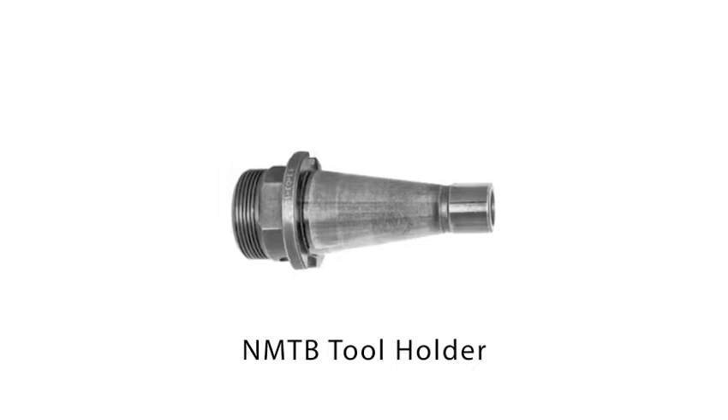This NMTB tool holder is the type of tool holder that was used in manual milling machines from 1927 until today. The wear pattern shown was typical on 7/24 taper tool holders.

This is the desired wear pattern that CNC V-flange tool holders should still have today. The only difference between the V-flange holders of today and the NMTB tool holders is that the straight diameter of the small end of the NMTB holder was removed, and a retention knob replaced the drawbar.

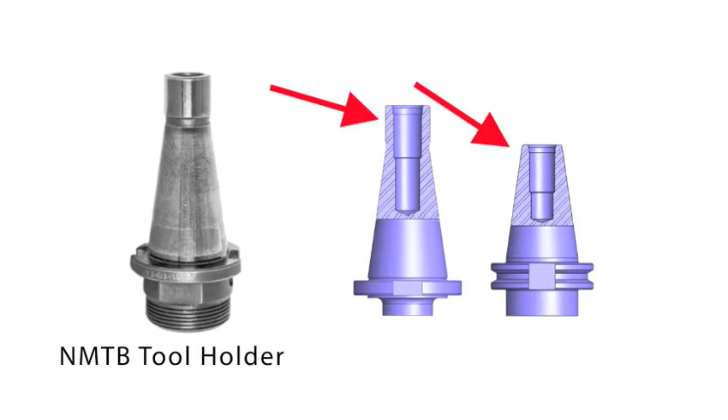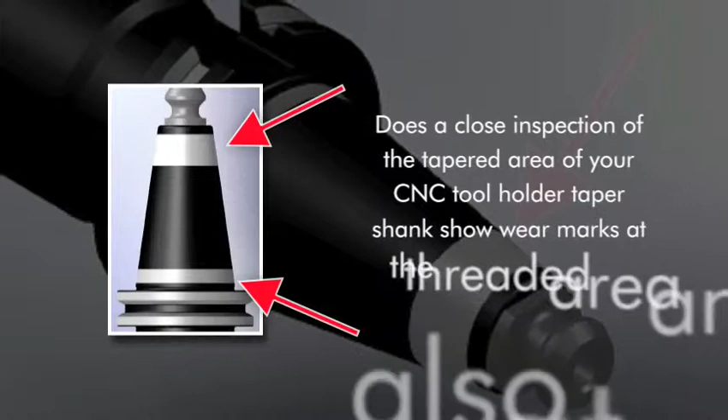Note that with the NMTB holder, the drawbar threads ended in the straight diameter and never entered the taper area of the tool holder. Does a close inspection of the tapered area of your CNC V-flange tool holder shank show wear marks at the threaded area and also at the gauge line? Chances are the answer is yes, because those marks are symptoms of a universal problem in the industry.

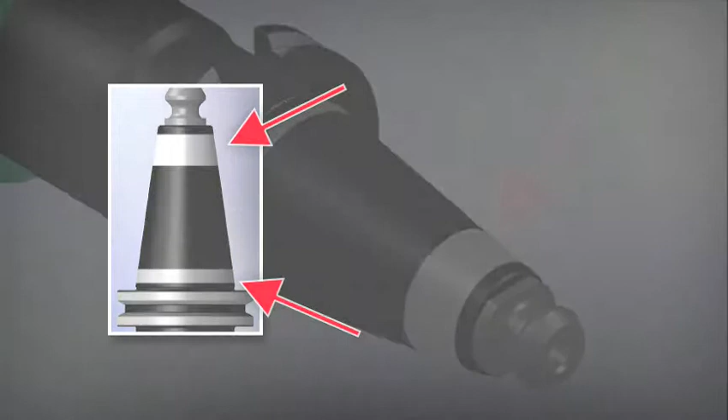J&M Machine conducted tests using the leading brands of retention knobs in the leading brands of V-flange tool holders. These tests have proven that the wear marks are a result of the expansion of the tool holder shank due to the installation of the standard retention knob.

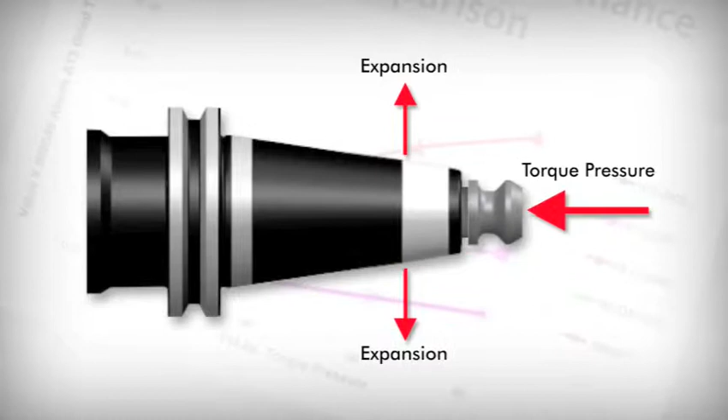The pressure exerted by the 60-degree angle of the threads of the standard retention knob results in growth in diameter of the small end of the tool holder shank.

Testing performed by J&M Machine has proven that tool holders should be checked for expansion prior to their installation into the machines. But how do you easily, reliably, and affordably measure diameter change?

J&M Machine has designed the patent-pending taper shank test fixture to easily and reliably measure expansion. This test fixture incorporates 3 highest quality indicators.

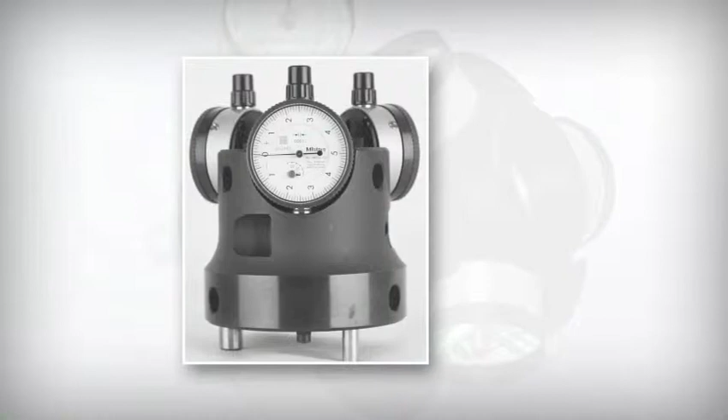Each line of the face of the gauge represents 0.000028, or 28 millionths of an inch, of growth in the diameter of the tool holder shank.

The test fixture, because of its design aspects, coupled with the accuracy of the gauges, can detect as little as 0.000007, or 7 millionths of an inch, of growth in the diameter of the tool holder shank.

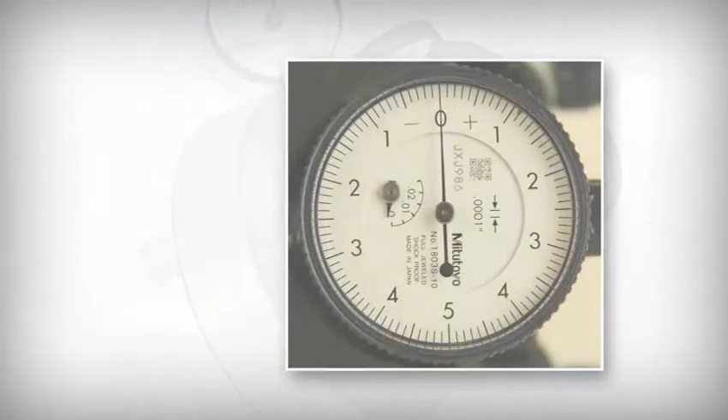Why make the investment in the taper shank test fixture? It's simple. Use of the test fixture guarantees that holders seat properly in the spindle when tool holders are changed.

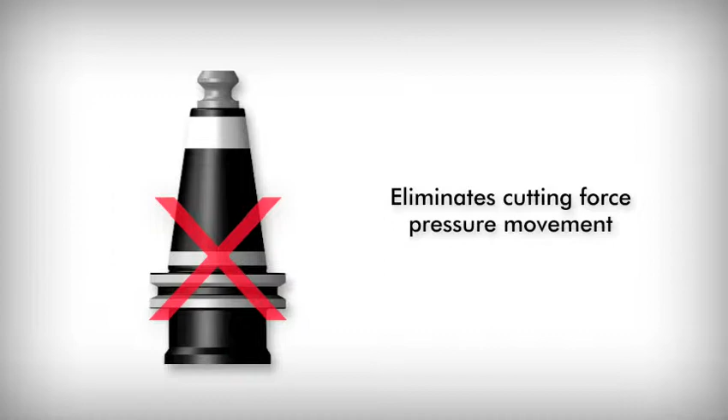Proper seating eliminates the fretting of a second angle at the gauge line of the tool holder by eliminating movement caused by cutting force pressure. This increases tool life by reducing tool runout and uneven chip load, resulting in better finishes, increased feed rates, and closer tolerances.

Runout and vibration that can break the fine razor edge on carbide tools prematurely is virtually eliminated. Balance of high-speed tools after installation of the retention knob is maintained, which in turn reduces tool life variance from one tool to another in the same cutting operation.

The net out? Longer tool life, less breakage, improved feed rates, and reduced downtime for machine and spindle maintenance, which all add up to more money to the bottom line.

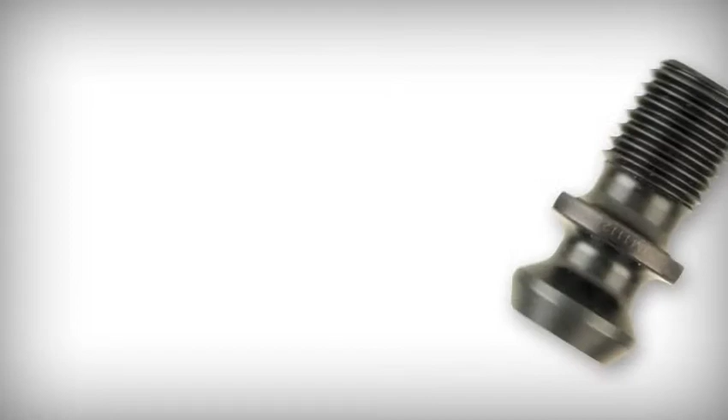How do you make sure your retention knobs aren't causing you problems and costing you money? Manufacturers know that there are 2 ways retention knobs are a detriment. First, they are not balanced. And second, they cause the tool holder to expand.

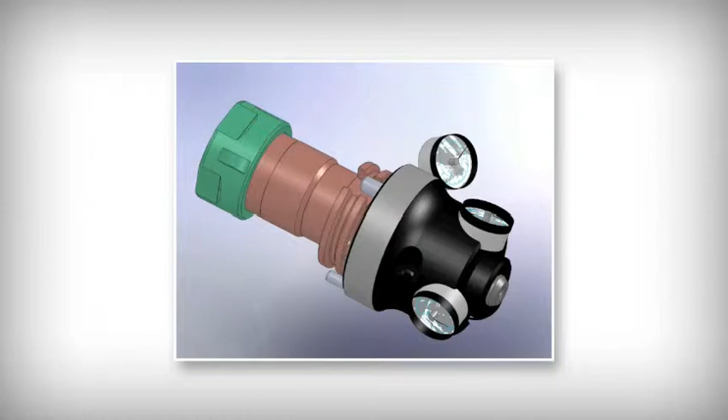Armed with the test results and using the taper shank test fixture, J&M Machine identified the need for a better retention knob that could hold up to higher torque pressures without causing excessive tool holder expansion.

J&M Machine responded by developing a new, patent-pending, high-torque retention knob design that produces the only balanced retention knob available on the market. Where other retention knobs start to expand the shanks of tool holders at torque rates as low as 5 to 15 foot-pounds...

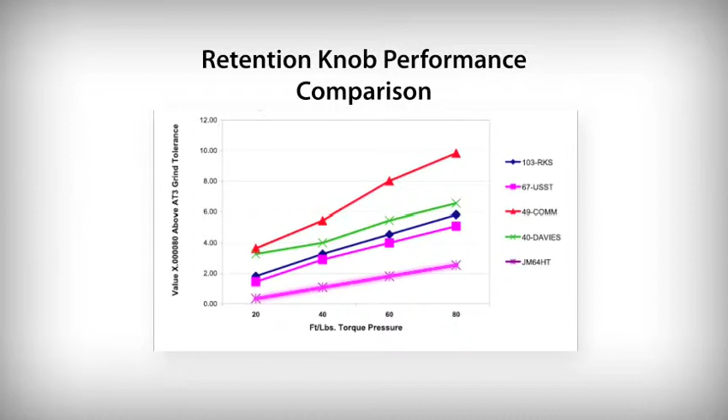...these high-torque retention knobs can be tightened to the same torque levels as standard retention knobs, but with 2 to 10 times less tool holder distortion.

ANSI retention knob designs include a pilot, which greatly reduces the chance of breakage. J&M manufactures all their retention knobs to the highest standards.

Made in the USA of hot-rolled 8620 steel and black oxided to guard against rust, these retention knobs provide improved durability, extended life, and reduced cracking potential.

J&M retention knobs are lasered with easy-to-read markings, so choosing the wrong knob isn't an issue. Installation of these high-torque retention knobs using J&M manufactured sockets and suggested torque wrench, J.H. Williams model number 1503 MFR-PS...

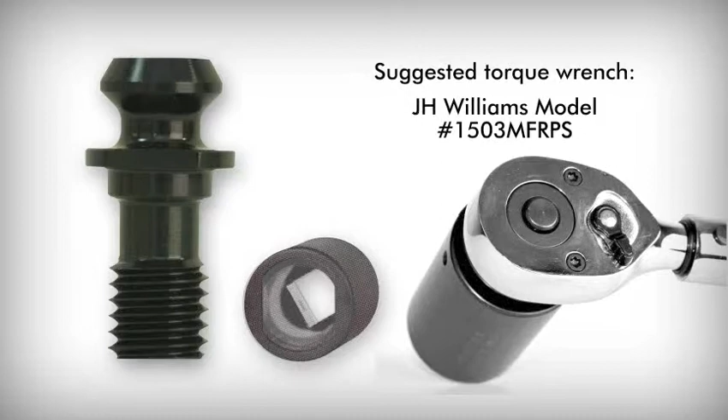...will yield longer tool life, less breakage, consistent feed rates, and reduced downtime for machine and spindle maintenance, which all add up to more money for the bottom line.

Be sure that when you sell a superior machine, your customer is using superior tools. Include a starter kit with each machine that would contain enough high-torque retention knobs to complete at least half the tool positions, plus the appropriate J&M socket and a torque wrench.

By specifying in the operator's manual, machine warranty, information plates attached to the machine in the tool holder loading area, and in your operator training classes that your customers use the J&M high-torque retention knob solution, you can be assured that your machine will hold the tight tolerances for which it is designed.

Start your customers out on the right foot by providing them with the right tools. You'll save on service calls that result from poor quality tools used in high quality machines. This winning combination will reduce your customers' milling costs by easily 10 to 30%.

The taper shank test fixture will prove to the machinist working on the floor that it's not necessary to torque the retention knob beyond J&M Machine's specifications.

Maintaining a taper shank test fixture at each distribution location will provide the tools you need to resolve chatter and vibration issues and out-of-tolerance situations, as well as to identify tool holder expansion problems. Maintaining the torque specification is not only preferred, but it is the key to safe operation.

Reduce buyer's remorse by making the post-installation machining experience as positive as possible. Starting off with the right tools will guarantee that the customer's results will meet his expectations from day one of implementation. Customer satisfaction translates to more sales in the future.

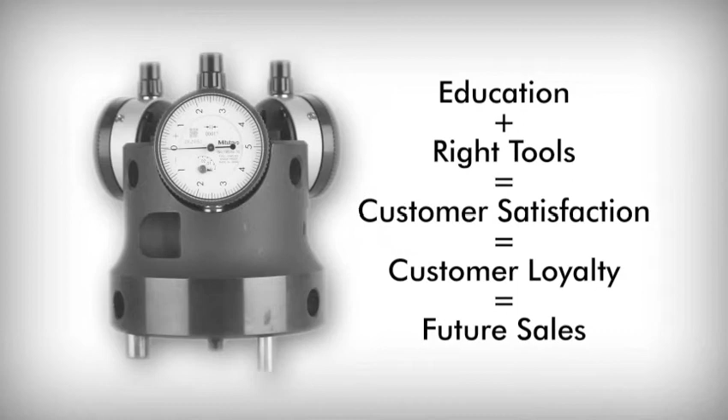Your key to success is customer satisfaction. Give your customer the right machine solution with the right tool solution and the knowledge they need to keep the results in line with their expectations.